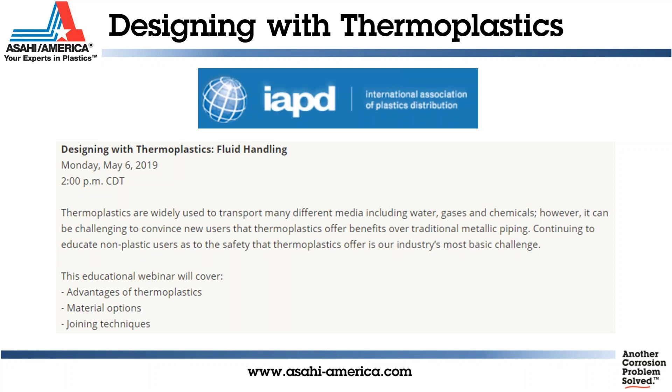As Courtney said, I have 12 years experience with designing plastic pipes. I also volunteer on several committees. The one of note here is the NPPS, non-metallic pressure piping system. That is a new standard that's being issued this month. Be on the lookout through the ASME website. I can direct you to that after the presentation.

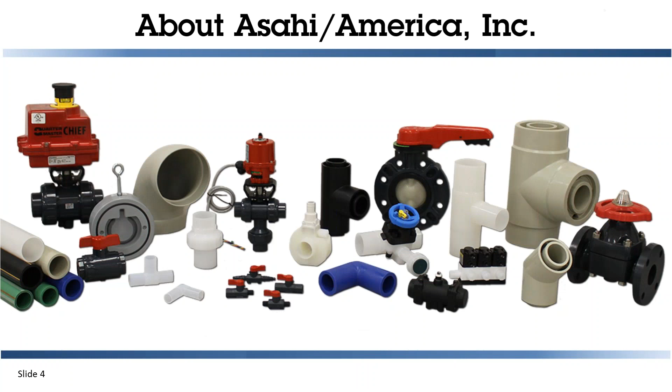Quick introduction about Asahi. We're a Massachusetts-based plastic company manufacturing and distributing plastics throughout the US and Latin America. We stock a lot of different components and we manufacture parts in this facility. A wide range of piping systems and valves in all different materials from PVC to ECTFE.

We have a broad range of applications that we'll go through and tons of application experience. In this presentation, I'm going to introduce some plastics. We'll go over some of the components required in plastic design, installation and joining of plastics, system overview, some important design considerations, common applications, and hopefully some questions and answers at the end.

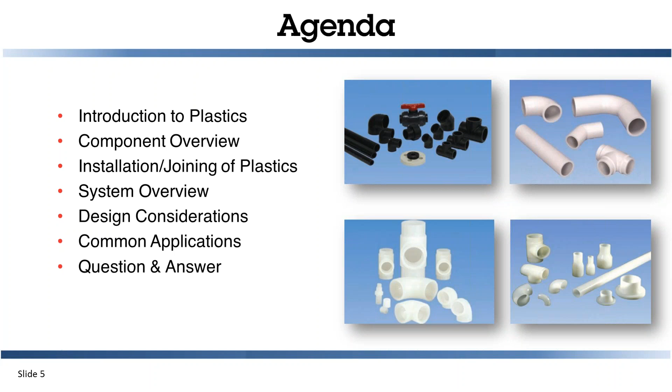Plastic piping systems are offered today in a wide assortment of materials and sizes. Each material has unique and specific properties. The diverse properties allow plastics to become the preferred system for many applications, ranging from the transport of aggressive chemicals to the distribution of ultra-pure water. Because each material has its own unique properties, understanding them becomes vital to the successful design, installation, and operation of a system. Designing a system made of thermoplastic materials differs considerably from that of metallic materials.

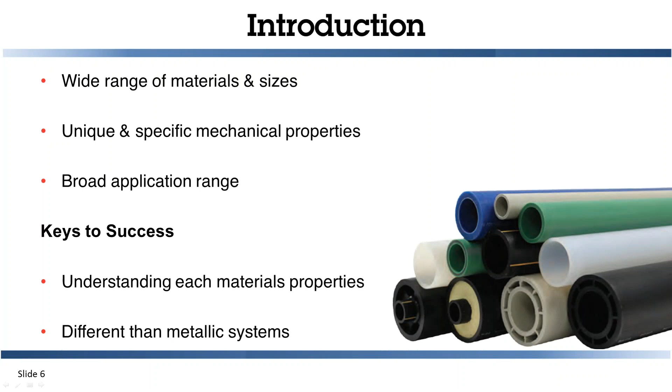This information is designed as a starting point for engineers, designers, and contractors in selecting and installing all aspects of the fluid systems.

Market segments that utilize plastics are as diverse as the material options available. Aquariums have unique challenges that balance the corrosion resistance required from salt water and cleaning chemistries with cost. Most aquariums are publicly owned and have limited budgets, in contrast to semiconductor and pharmaceutical clients who often have healthy budgets but require advanced polymers for production of high-end products. Water and wastewater treatment facilities have dozens of different methods for utilizing chemicals to treat media before and after usage. Just a note that there are over 16,000 publicly owned wastewater treatment plants in the US, all operating similar chemicals and systems.

Chemical manufacturing often requires extremely resistant materials to transport high concentrations of the media. You will find a range of plastics applied in chemical manufacturing facilities. Finally, solid waste and landfills have significant thermoplastic usage. Most sites try to capture the methane produced from landfills with a PE pipe buried within.

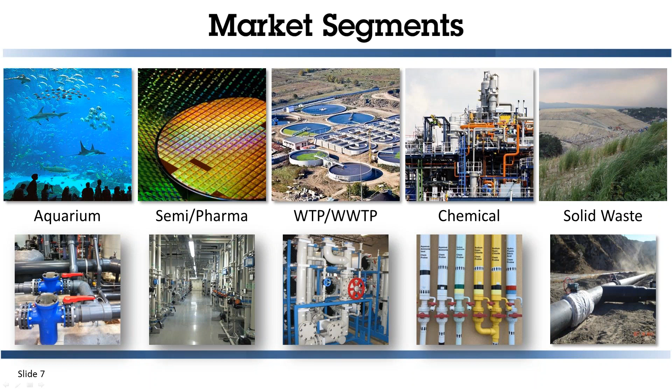Plastics are non-conductive and therefore immune to galvanic and electrolytic corrosion. Because plastics are corrosion resistant, pipe can be buried in acidic, alkaline, wet, or dry soils, and protective coatings are not required. In addition, cathodic protection is not required.

Because plastics are impervious to many chemicals, they are gaining an ever-increasing acceptance and preference in a large variety of applications. Additionally, the variety of materials available allows a wide range of chemical solutions to be handled successfully with plastic piping. All plastic piping materials have low thermal conductivity. This allows the temperature to maintain more than metal systems. You're going to have the temperature insulated prior to the actual piping installation.

Because the interior surface of plastic piping is generally very smooth, less power may be required to transmit fluids. Plastic piping compared with other systems will require less energy to move that fluid.

The relative chemical inertness, and minimal effects of internal and external corrosion, mean there is very little change in the physical characteristics of plastic piping over dozens of years. Examinations of pipe samples taken from some systems have shown no measurable degradation after 25 years of service. Most thermoplastic systems can be designed for a useful life of 50 years and sometimes much longer.

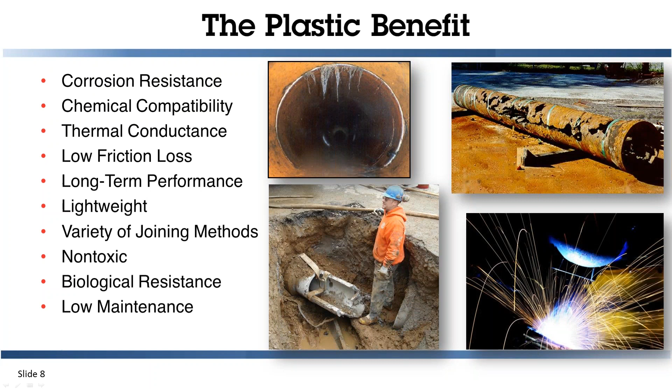So there's a bunch of different plastics out there available, and we'll go through this list summarizing the availability and some of the considerations.

PVC is an excellent material. It has great application range. It's widely available and has a temperature limit of about 140 degrees. It's probably the most well-known plastic out there on the market.

Then we look at CPVC. Its advantages are very similar to PVC, except it has a higher working range up to about 195 degrees Fahrenheit. It should be specified in some instances where hot corrosive liquids are being handled, or you need an extra safety margin.

PE is another very widely available product. There are different grades of PE out there. HDPE, high density polyethylene, is generally superior to LDPE, low density polyethylene. It's important to know which mechanical properties you're reviewing when selecting polyethylene, because there are many different polyethylenes out there. Make sure you're selecting the right cell class for your application. Polyethylene can be used in low temperatures without risk of brittle failure.

Polypropylene is a member of the polyolefin family. It is one of the lightest plastics known. It possesses excellent chemical resistance to many acids, alkalis, and organic solvents. PP is one of the best materials to use for systems exposed to varying pH levels, as many plastics do not handle both acids and bases well. It is not recommended for hydrocarbons and aromatics, and it typically has a temperature limit of about 212F, water boiling temperature.

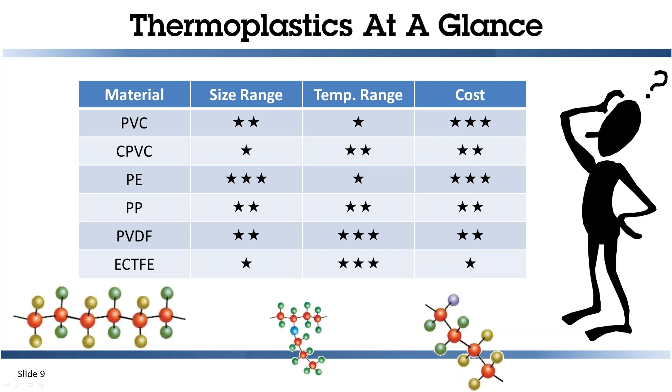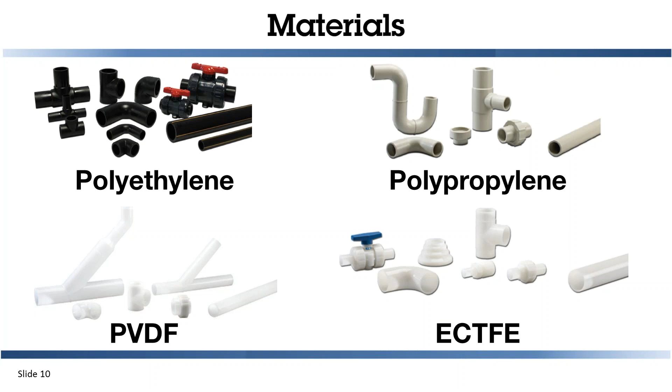Polyethylene has the largest size range available, from 1/2 inch up to 118 inches, about 3 meters, and even being produced above 3 meters today. Wide range of temperatures, 0 to 140, and you'll note that it is UV resistant. Typical applications, we recommend bleach, 85% sulfuric acid for some advanced polyethylenes, and it's used in a lot of gas and water applications throughout the country.

Polypropylene is available up to 55 inch, temperature range of 20F to 212F. It is not UV resistant, so you have to protect it from the sun, whether it's an awning covering the system or painting it with a latex-based paint. Again, a pH range of 1 to 14. Typical applications are caustics and acids.

PVDF is commercially available up to 16 inch, has a range of -40 to 250F. It is UV resistant, recommended for acids and up to 96% sulfuric acid. ECTFE is commercially available up to 4 inch in piping systems, working range -40 to 300. Typical application is 98% sulfuric, chlorine dioxide, and ozone.

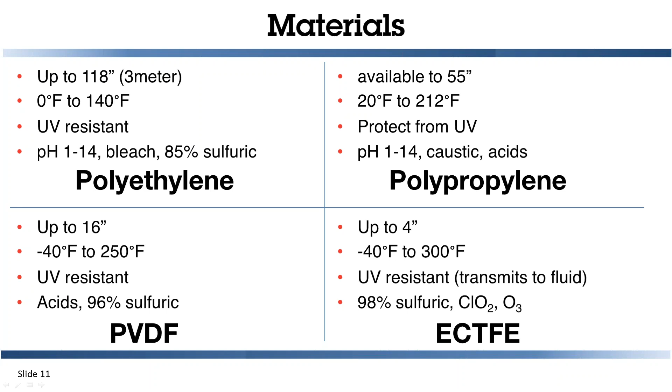When it comes to the component design of these systems, there are two ways of determining the outside diameter: iron pipe size or metric-based systems. Metric-based would be a millimeter-sized piping system.

There are two different ways of getting the inside diameter. The most common is a schedule system, which essentially matches existing steel industry dimensions, like Schedule 40 or Schedule 80. SDR is the standard dimensional ratio, and that's the system we use most for polypropylene, PVDF, and ECTFE systems.

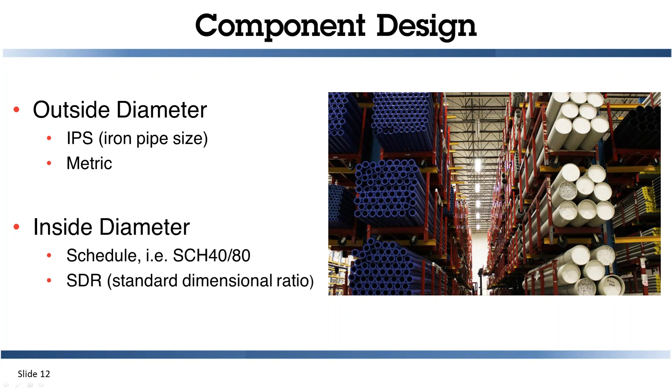Schedule ratings often ignore material properties, and in many cases waste excess material and cost just to meet the required wall thickness. Standard dimensional ratio is more consistent and takes into account the properties of the material. All pipe sizes in the same SDR for a specific material have the same pressure rating.

Let's take a look at half inch PVC. Schedule 40 PVC has a pressure rating of about 350 PSI. When you go up to 12 inch, you have a pressure rating of about 80 PSI.

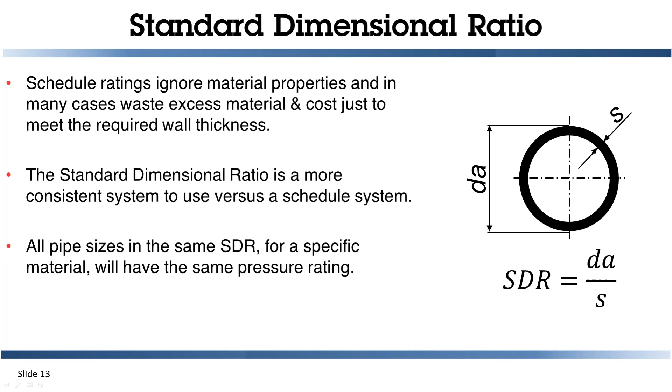Versus polyethylene SDR 11: half inch is 200 PSI, and 12 inch is also 200 PSI. So no matter the size, if the ratio of the OD to the wall thickness is the same, you're going to have the same pressure rating. It makes it very easy to design piping systems across a wide size range.

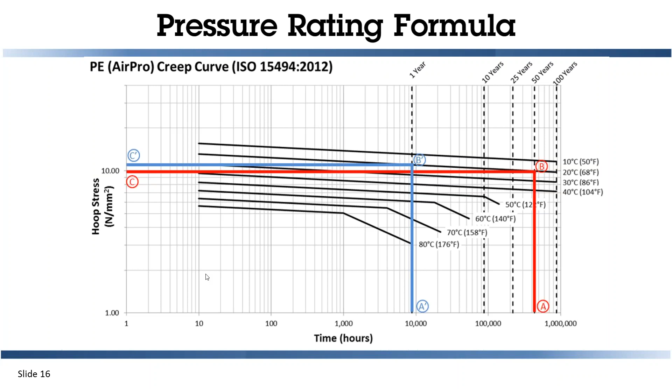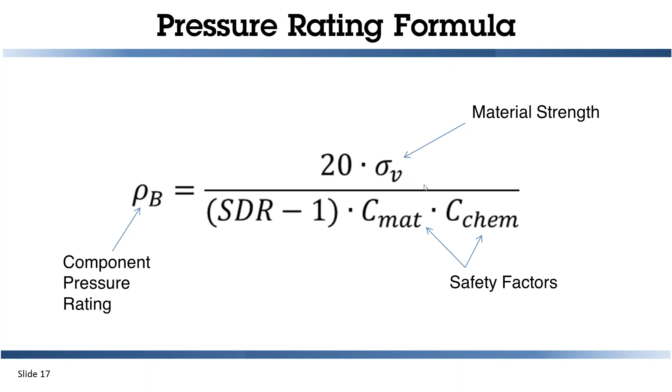When it comes to chemical resistance, it's very important to know where you're getting your information from. There are dozens of compatibility guides out there online - I always recommend asking the specific manufacturer for their guide.

When you are asking for information from the supplier, if you can provide as much information as possible, that would greatly reduce the time to find a recommendation. Remember: stamp, size, temperature, application, media, and pressure.

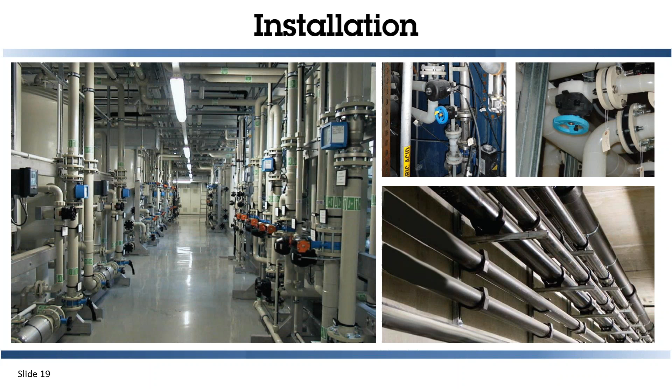Plastic piping can be joined by numerous methods, and for each material there are several appropriate methods. Some of the most common are solvent cementing, socket fusion, and butt fusion. And of course we always have mechanical methods like threaded joints, flanges, O-rings, things like that. That variety of joining methods allows plastics to be adapted and used in the field if you want to transition from metal systems or in between plastic materials.

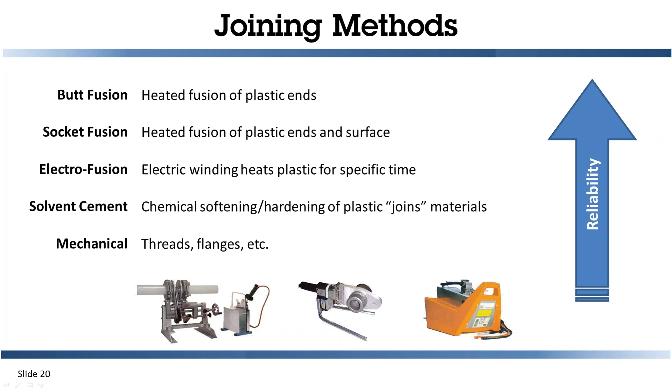On this, we're showing different joining methods. We have mechanical on the bottom, and as we go towards the top of this list, we have a reliability increase, where butt fusion has the highest lifetime expectancy of all these installation methods. And we'll go through them.

Threaded connections are often available up to about 2-inch size. They are available in NPT or metric upon request most times, whether that's an M thread or a JIS thread. We want to be able to adapt to those systems. You'll notice that on the right side, we have a welded side that goes into the pipeline, and on the left side, you have a threaded connection.

One thing to ask the manufacturer is about threads without mold seams on them. That's a common leak place for threaded connections. With these threaded connections, you do use tape on them most often, and you can screw it in, but don't over tighten it because you could strip the threads.

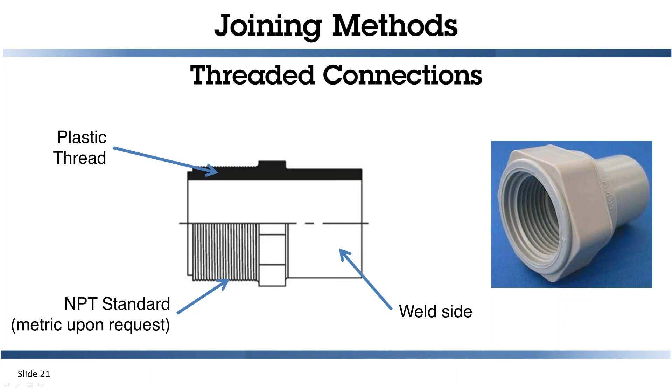Another useful method is a union joint. These are available up to 2-inch in most materials and up to 4-inch in some other materials. It is a static O-ring seal that compresses two sides together. It's a good way to transition between two materials from a similar manufacturer. On one side, you could have PVDF. On the other, you could have polypropylene. If your application allows you to change materials, this is a good way of doing it.

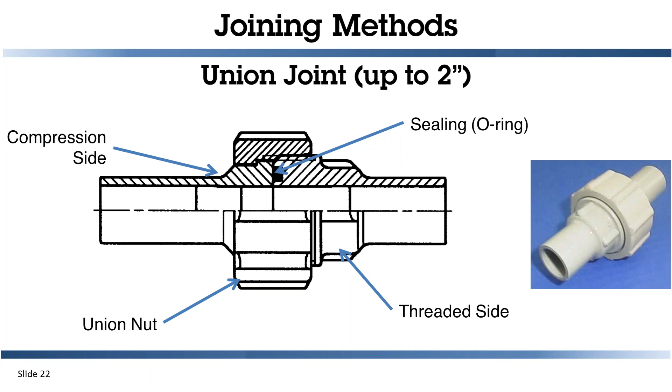If you have larger sizes or are transitioning to metal systems, a flange is the easiest way to do that. Flanges with plastic systems often have what we call a stub end, which you see on the bottom middle, and you have two sides of that with a sealing in between, typically a gasket. Then you have backing rings that have a metal core on the inside that gives it rigidity and strength. Those are bolted together and create a sealing point at the flange.

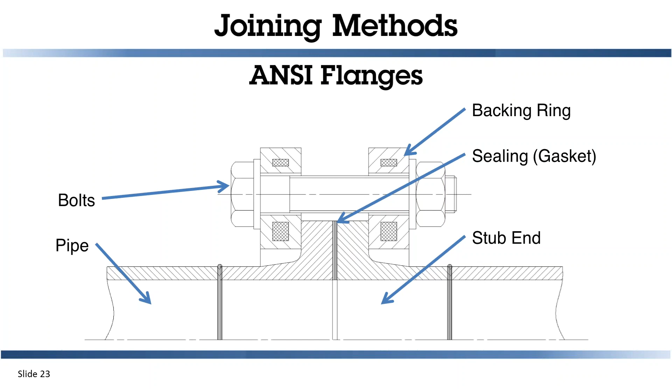Finally, 3 different welding types are available for plastics. We have socket, that's available up to 5-inch, butt fusion, which has no size limit, and electrofusion, which is typically reserved for polypro and polyethylene.

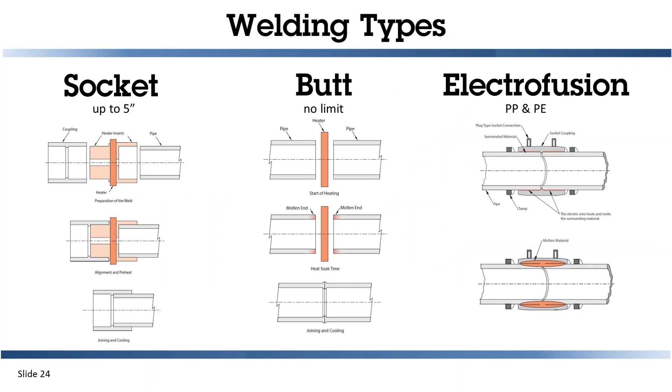Socket fusion has a heated tool, which is the red component in the middle of that picture. On one side, you put the coupling or fitting. On the other side, you insert the pipe. After just a few seconds, they come to temperature, and once they're at temperature, you remove them from the tool and stick it together. One of the critical aspects of this type of weld is people are transitioning typically from the knowledge of PVC to this sort of installation.

It's important that the joiner does not twist the coupling and pipe. It's a common practice in PVC solvent cement, but it does not apply here. It's just a straight in, straight out fitting.

So then we have a highlight here. We have a setup of the tool. We have preparation of that with the polyolefins. Any material that can oxidize, we want to remove that oxidation that's just naturally occurring on the pipe. That's the polypropylene and polyethylene materials. And that makes sure that we have a good chemical resistant bond between the coupling and the pipe.

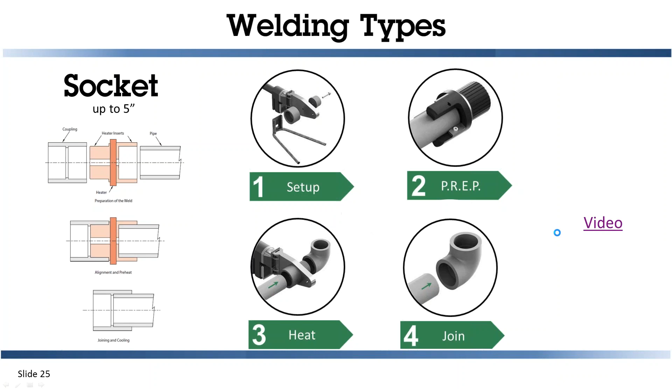This is a socket fusion joint that's been cut in half, and you can see the internal ring of the pipe material. The joining area is actually molecularly bonding the coupling to the pipe. There's zero chance of leak between here because of fusion.

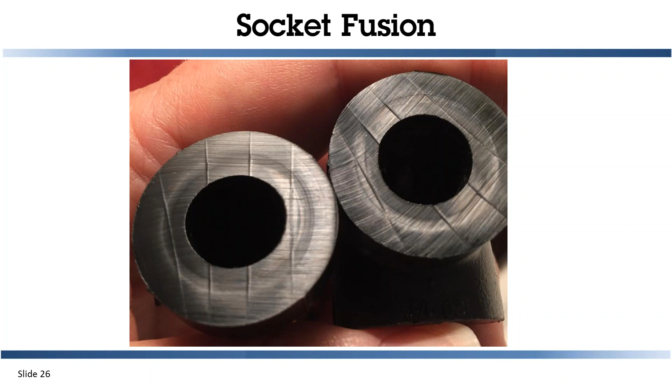Butt fusion, like I mentioned, has no size limit. You have the pipe that's compressed against a heater. After a certain amount of time, you remove the heater and push it together. This is done with a welding tool that is rented or purchased from the manufacturer, and you have to follow the prescribed welding times and cooling times for this. Because there's no coupling here, you're actually reducing the overall labor to weld and install this. You just have pipe to fitting with a butt fusion weld.

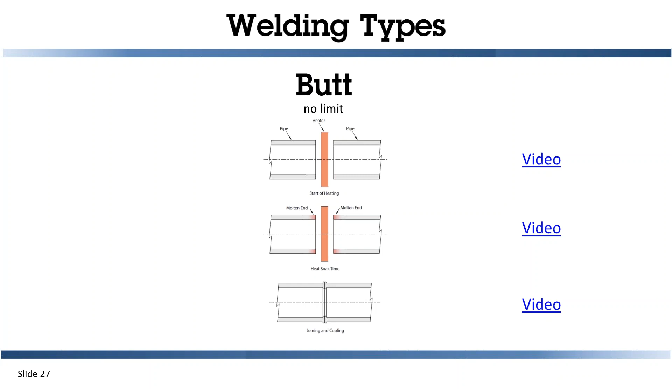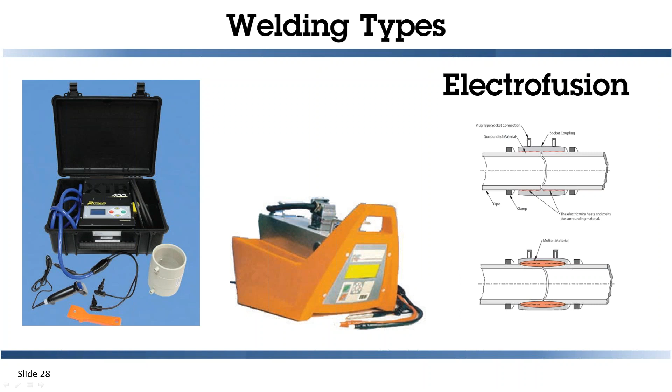This is a great method for water installation. We use it a lot for repairs or changes in direction or hard to reach places like below grade or in a ceiling where you can't bring a butt fusion tool. The added cost of the coupling can add up considerably, so it's not the preferred method for a complete installation. It's a nice system to know about in case you have to use it.

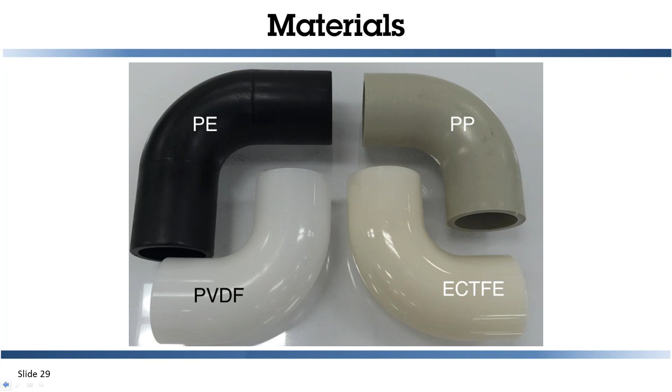And here again, we have the 4 materials showing a smooth radius elbow.

For polyethylene, there's been great advancements in the material over the decades since its beginning in the 50s and maybe even before that. For all polyethylenes, there's a standard tensile test done in an acid bath that attacks the material. It's a full notch-creep test. We put a notch in the strip of material, then pull a tensile test on it at an elevated temperature with a chemical bath. We're trying to get this material to fail so we can know how it's going to react over the lifetime of the system. Time to failure is a good indication of how it's going to resist oxidation from aggressive chemicals.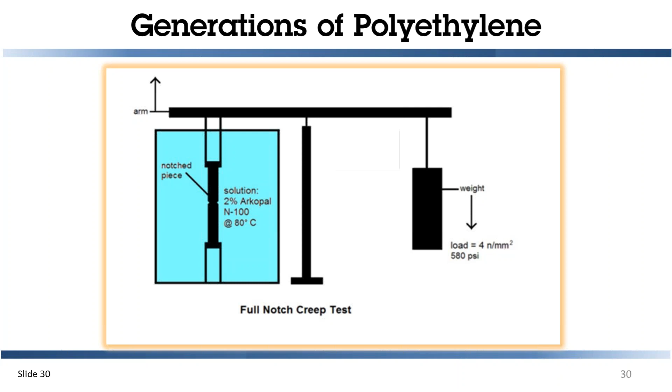This allows us to go into different applications for these materials, the advanced polyethylene, PE100RC. For most polyethylene SDR11 applications, we have a 150 PSI pressure rating. As temperature increases, we need to reduce that pressure, so the maximum temperature is 140 with a pressure limit of about 80 PSI.

Because of this advanced resin, we're able to apply it to really aggressive media like bleach. We know that with sodium hypochlorite and the advanced PE, we can have successful installations of about 110 to 112 PSI at ambient temperature.

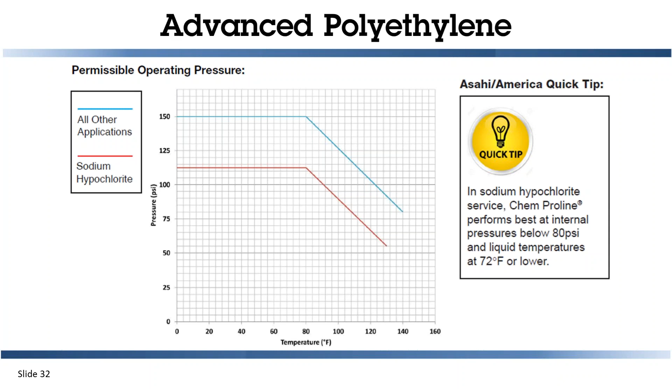That same strength characteristic we see in that tensile test, which allows us to apply it to oxidizing chemicals, is actually good from the outside as well. Here's an application where a pipe was installed in a trench, and the contractor was able to save significant cost by not having to truck in sand to lay the pipe on. Where it's allowed by code, this might be a useful method to install the advanced polyethylene pipe. You can use the excavated material to bury the pipe and not worry about point loads from the rocks.

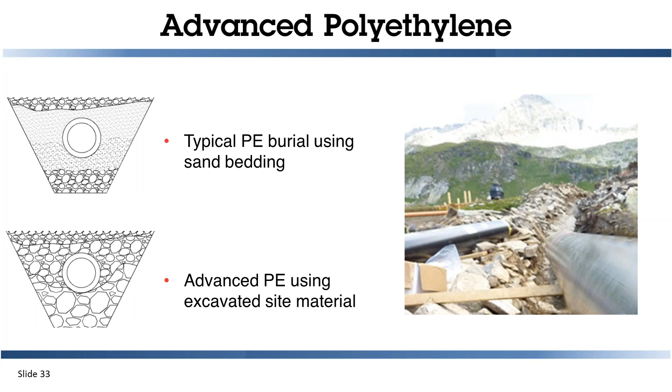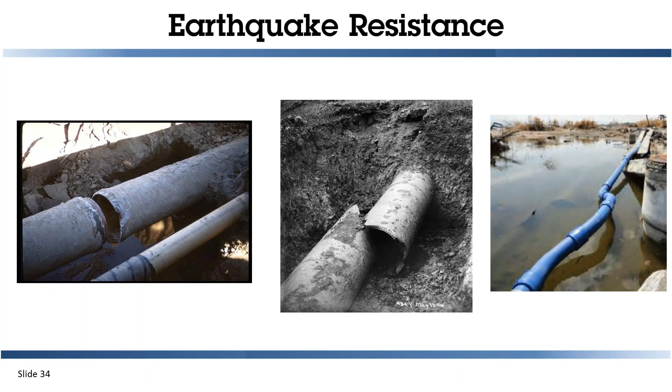In general, polyethylene is used around the world and has great earthquake resistance. We can obviously compare it to steel, concrete, and fiberglass. Polyethylene is very robust and flexible. So here are some images of what might happen to a pipeline in an earthquake.

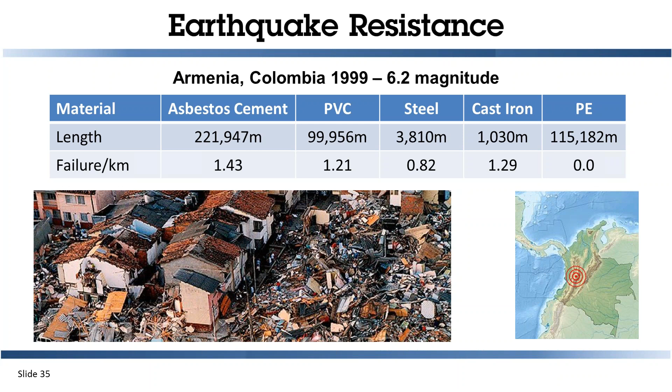A couple of case studies: '99 in Colombia. You see the length of pipelines, and then you have failures per kilometer. Polyethylene had 0 failures in this earthquake, and it was a devastating earthquake. The PE pipe, whether transporting water or gas, still might need to be inspected after the quake for replacement opportunities, but the bottom line is it did not fail catastrophically.

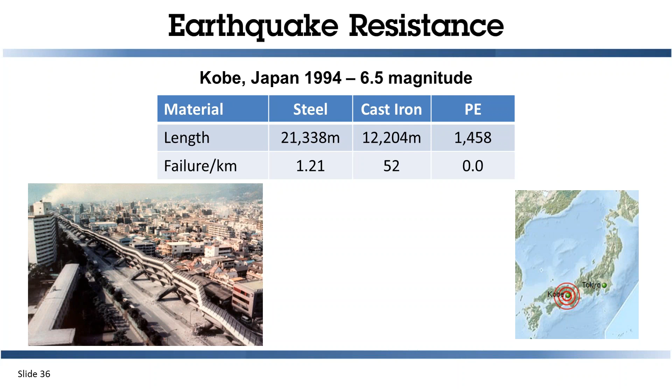A similar situation occurred in Japan in '94—smaller sample size, but again, 0 failures per kilometer. Finally, in Turkey in '99, a 7.6 magnitude earthquake, 0 failures per kilometer versus the other piping systems.

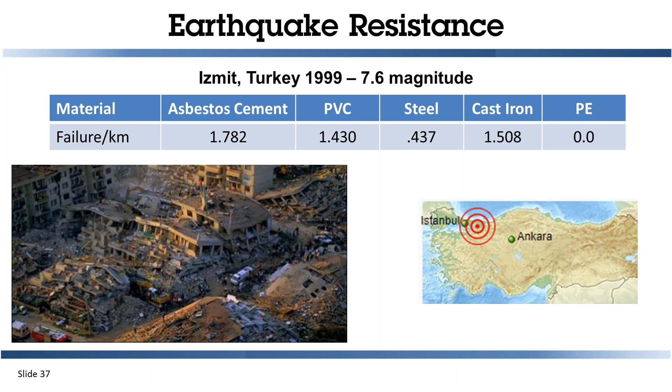Polypropylene is our next material. Polypropylene is available in 2 different SDRs, SDR11 and SDR33. Maximum size commercially is about 55 inch, and those have 2 different resin types: PPR, which is a random copolymer, and PPH, which is a homopolymer.

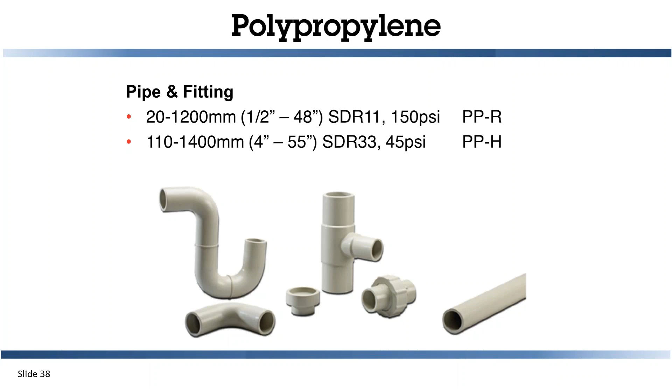PPH is the propylene molecule just connected to itself. It is a homopolymer, meaning no additives in that system. PPB is a block copolymer, where a block of ethylene is added into the material, giving added flexibility and smoothness. It's not really used for piping systems anymore.

People have moved towards PPR, which has a similar concept. It has randomly injected ethylene into the propylene, giving it more uniform dispersion and better strength than the block copolymer. On the right-hand side, you see a crystal structure, which is the surface finish under a microscope. For homopolymer, we're limited to really jagged edges, which is a place where chemicals might attack on a molecular level.

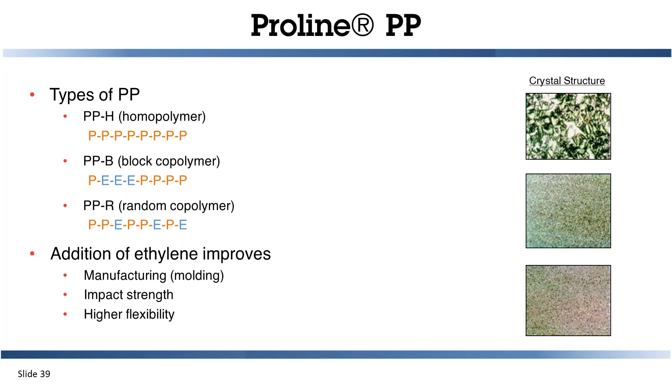By the addition of ethylene, we get a smoother surface area, and that does a couple of things. First, it's easier to manufacture, especially in molding. We have fewer voids on the inside of the material, meaning a higher end quality product. We have a higher impact strength and a higher flexibility, so it will move more. The downside to that is slightly closer support spacing for the PPR systems versus a homopolymer system.

Polypropylene has different applications: one would be water, and one would be chemical. The formula I showed earlier has an area to put in a safety factor for chemical applications. It's important that if you're using polypropylene for water you know that, and if you're using it for chemical, that you add an additional safety factor.

Let's look at the top two lines here for the SDR11 system. SDR11 for water is approaching 200 psi. For chemical applications, we really take that down to 150 psi, which covers a lot of the tenacious chemicals that we're transporting in the systems. That gives you a 50-year life for the chemicals that we say are compatible.

With SDR33, we have a 55-60 psi rating, and about a 45 psi rating for the chemical applications.

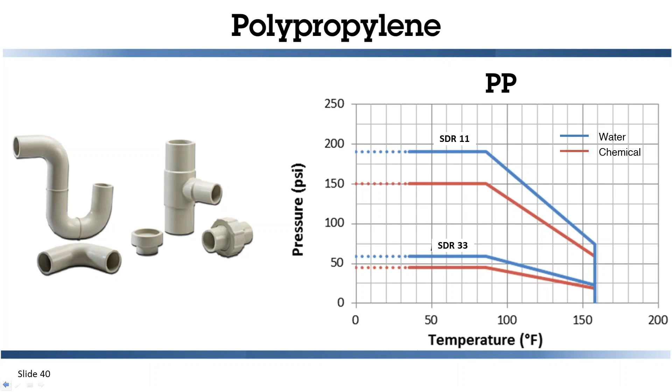Another way of looking at that is the years in service. PPR, because it is a little more flexible, gives a higher pressure rating across the board. So PPR for 1 year is the top line here we see. Depending on the temperature, you have a corresponding pressure rating. PPH is a little more brittle, so we have to be careful about overpressurization, and a little more careful in the design of PPH systems. PPR for 50-year life, easily 150 psi for a very long time at ambient temperature.

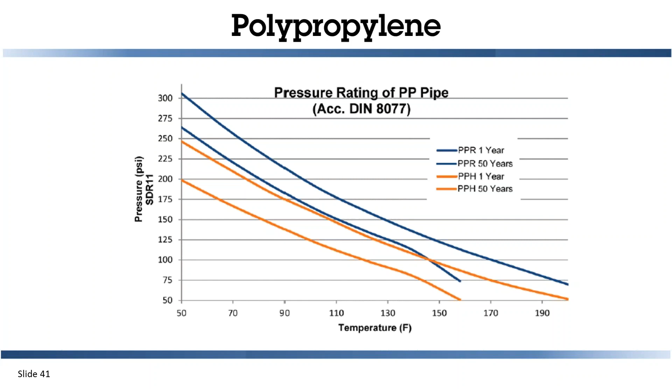PVDF, the first fluoropolymer we'll talk about, has two SDRs available. SDR21 has a 230 psi pressure rating, and SDR33 has a 150 psi pressure rating. So a little bit higher than the polyolefins, and with a thinner wall. The higher the SDR number, the thinner the wall.

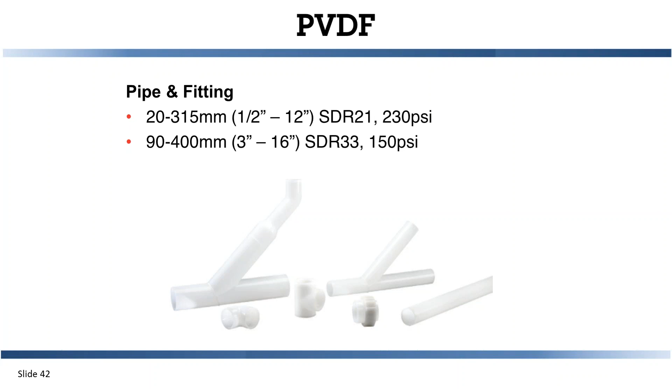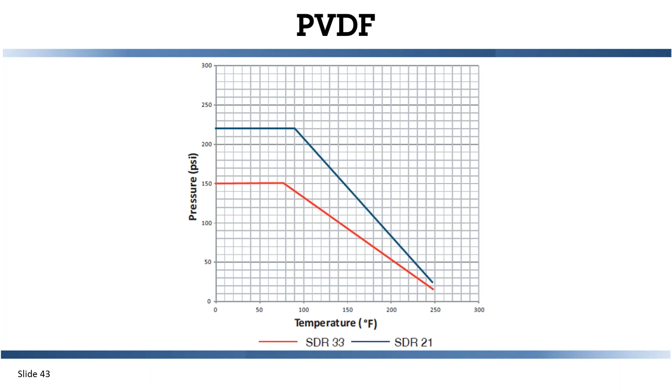One of the advantages, and questions you should ask a supplier, is the availability of that smaller wall thickness. You can save significant cost by switching to an SDR33 piping system starting at 3-inch. If you don't need a 230 psi system, the availability of SDR33 can cut the material cost significantly.

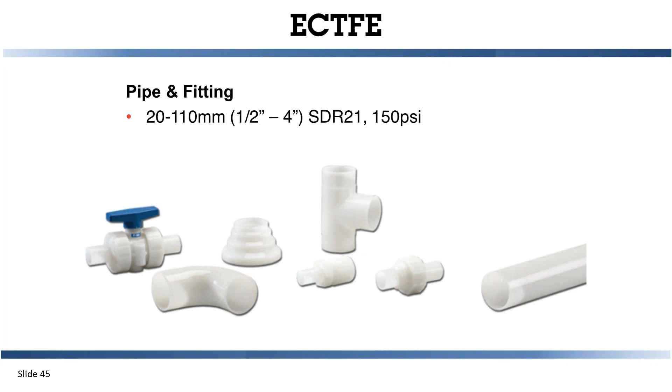ECTFE, the final fluoropolymer we're looking at, is commercially available up to 4-inch. It has an SDR21 design and is 150 psi rated. Of course, all the components—tees, valves, pipe—make it a complete system.

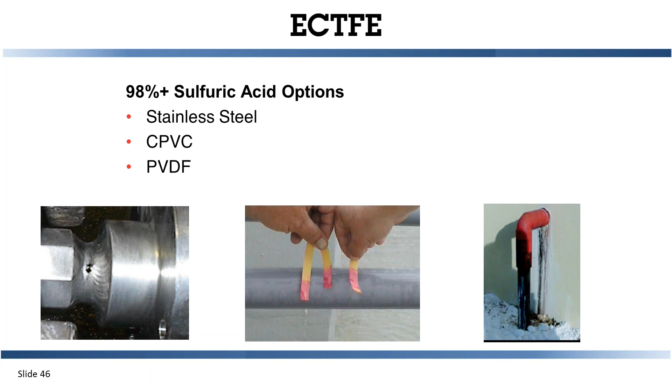ECTFE's main application is for 98%+ sulfuric acid. There are options available. On the left, we have stainless steel being used in that application—you can see the pinhole being formed in that mechanical joint. Then you have CPVC, where the sulfuric acid has actually permeated the pipe and it's acidic on the outside. I certainly wouldn't want to be in that plant with the opportunity to touch that pipe and get a chemical burn. We have PVDF on the far right, which is leaking at the joints, painted red for identification. And that's not snow around the ground—that's the chemical that has actually been leaking.

98%+ sulfuric acid has a contaminant known as sulfur trioxide. Sulfur trioxide is a known stress cracking agent for all PVC, PP, and PVDF. ECTFE is resistant to both sulfuric acid and sulfur trioxide, and that's what gives us the confidence to apply it for these applications.

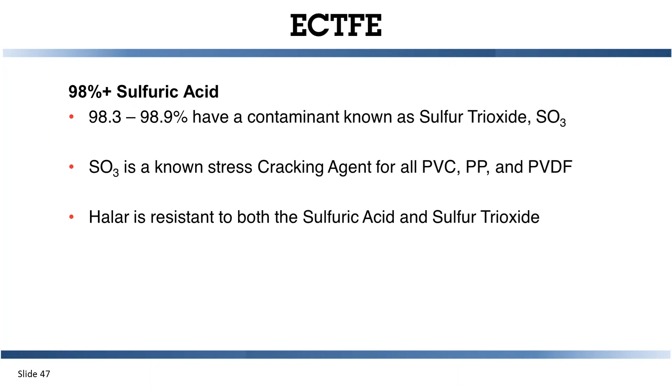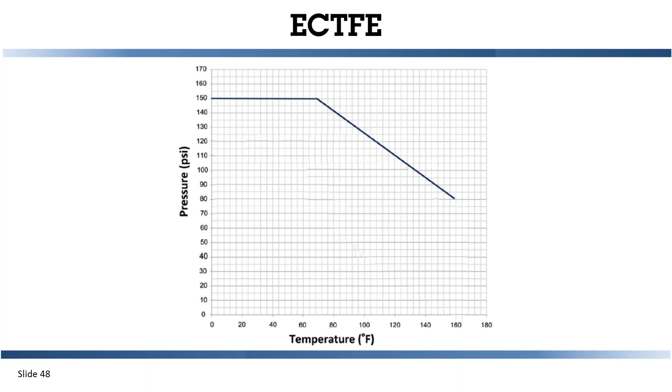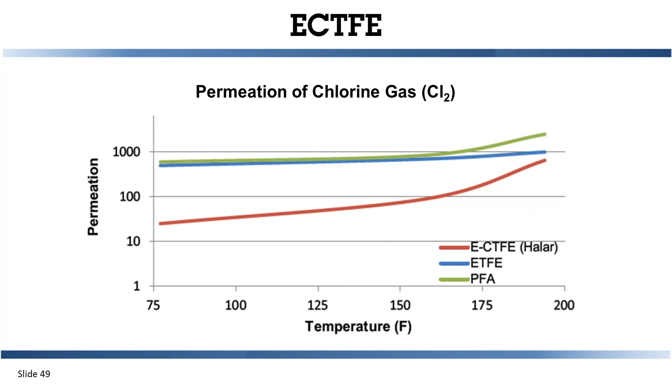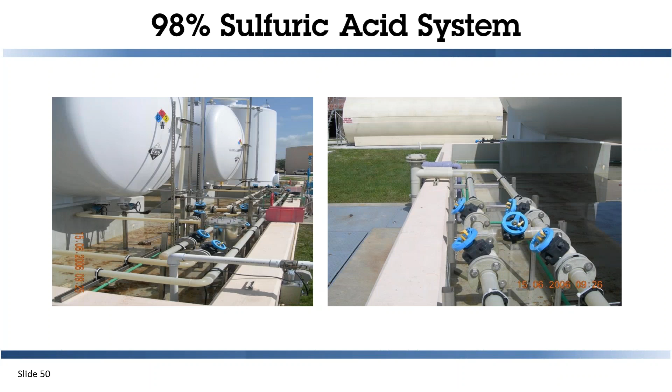A couple of applications: wastewater treatment plants that are using 98.3% sulfuric acid, with lots of tanks taking this into a building for dosing.

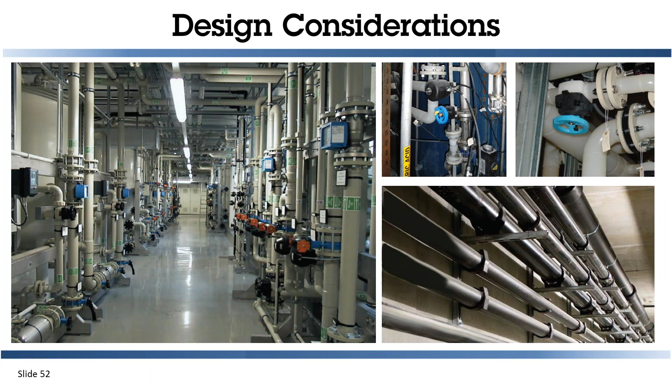So back to our installation images. How are these nice installations? Because people have considered them and designed it with plastic materials in mind.

One of the most important design considerations is the expansion and contraction of the piping systems. Plastic will expand far more than metal systems. Polypro and polyethylene expand at a great rate of 1 inch per 100 feet per 10 degrees, about 10 times that of steel. For all plastics, we need to consider how it's going to react when you install it versus the operating temperature.

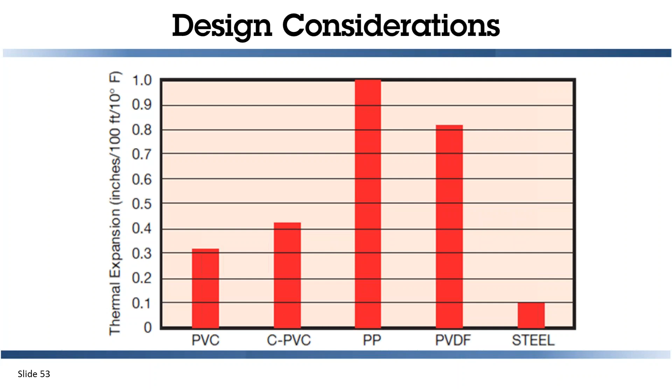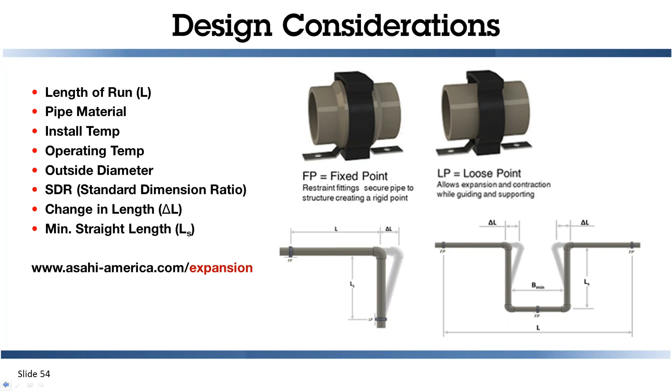If you only had two fixed points on either end of the pipe, the expansion of the center portion will become like spaghetti, and you're going to have a visually unpleasing pipeline. To make it straight, we want to guide that expansion so it does not sag, so we use loose points in between those fixed points so the pipe remains straight.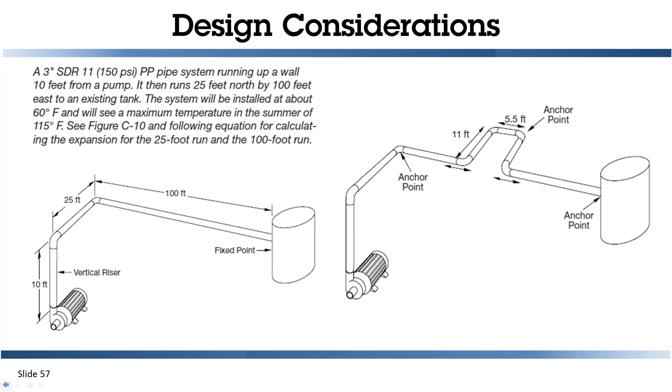Here's an application of a long pipe run. This was actually installed in the right-hand corner of a buried trench, and the designer made their own band straps to go around fittings. This was advanced polyethylene for a bleach application.

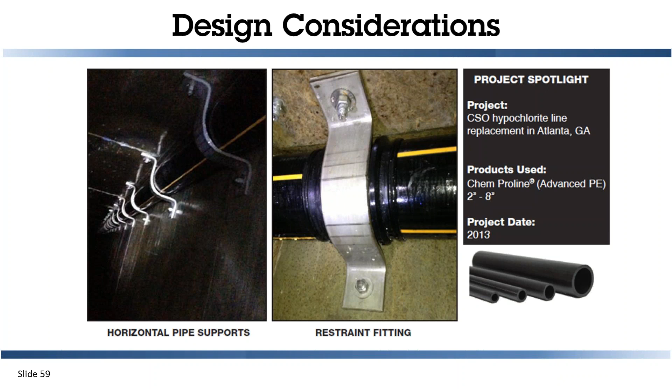Another nice thing about plastics is that they are pretty flexible, and we can build that into our design. If you have an outdoor installation, you can reduce or eliminate elbows used in the field by simply bending the pipe. Typically it's about 20 to 30 times the piping diameter, depending on the material and temperature, where you can actually bend the pipe around a corner. Useful for large outdoor installations.

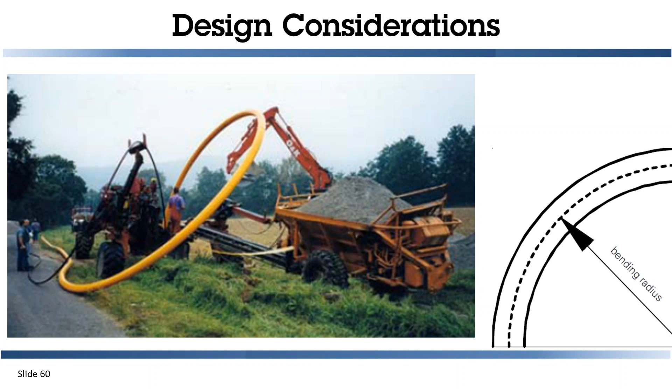I like to show this image because it gets us thinking about how to avoid this in the future. Some of the best ways to avoid failures on site are to select the right material, make sure that you're doing the proper weld method, and make sure that your contractor is knowledgeable on installing the systems and has been trained by the manufacturer so that you're reducing your risk on site for failures.

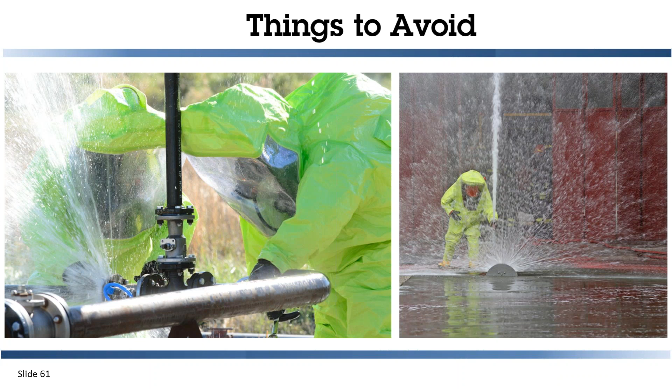Common failures in bleach piping, as you see here, is leaking of pipe at solvent cement joints. This is bleach attacking the joints and coming out of the fitting. So what is the perfect pipe? It really doesn't exist. You're trying to balance the cost of the material with the lifetime, and most municipalities don't have an endless budget, so we're trying to create a system that has a long life at an affordable cost.

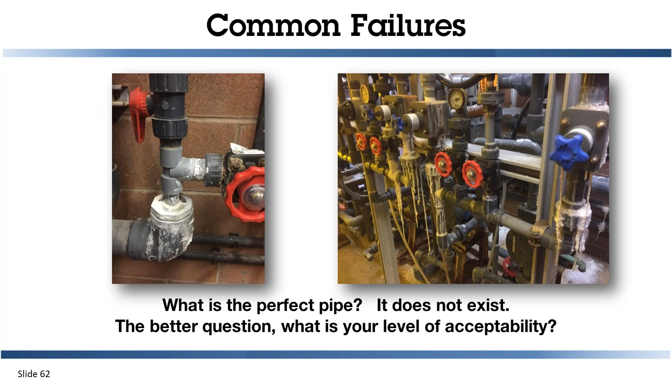So why does PVC tend to fail with bleach applications? When it comes down to it, a solvent cement joint is nothing more than a cemented fitting. We have separation here. This is a peel adhesion test where we're taking the coupling and peeling it back off the pipe. If we were to do this on polyethylene or polypropylene, you would actually have the pipe and the fitting peeled back together and ripping.

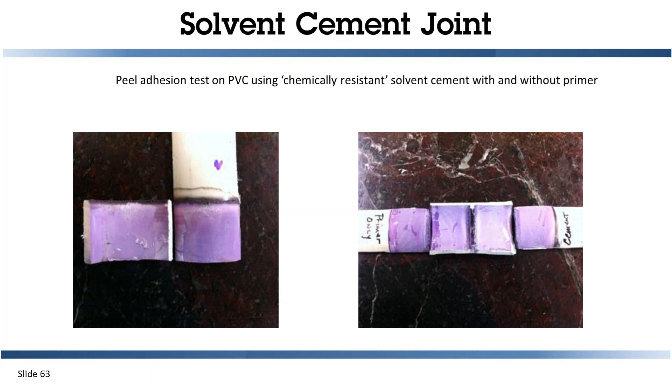So this is one of the common areas of failure because it's so available. People are using PVC where it's maybe not necessarily chemically resistant. Education on the proper thermoplastic and proper installation method will really reduce this in the future.

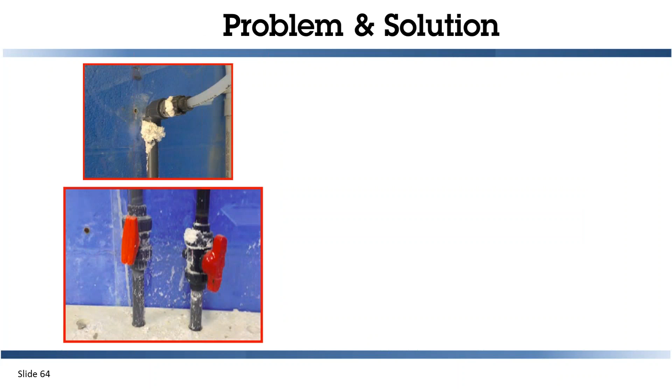On the left, we have a bleach application. Again, valves look like they're leaking. The joints on the top are leaking. The solution is a welded system using the advanced polyethylene material.

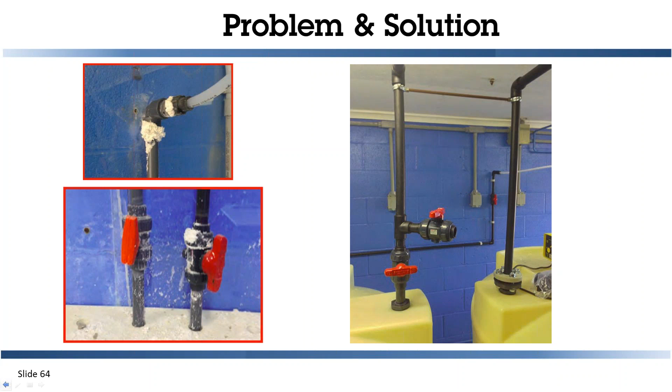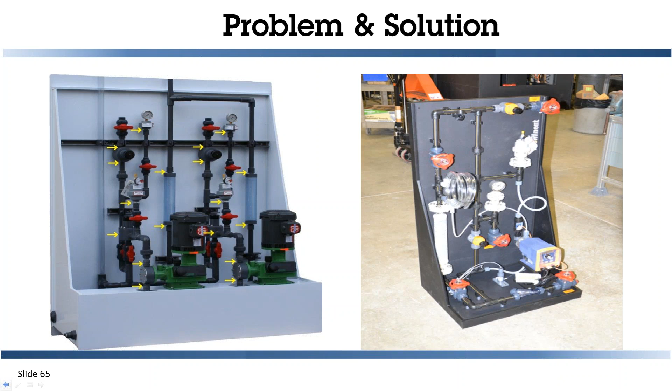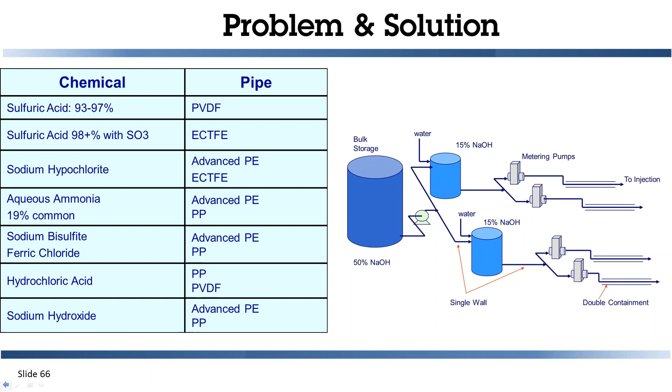For sodium hypochlorite, advanced PE or ECTFE. Aqueous ammonia, 19% is the most common, we have advanced PE or PP. And then we have sodium bisulfite, ferric chloride, hydrochloric, sodium hydroxide, all different options based on the customer's acceptance for price, size considerations, and total available pipeline they're installing.

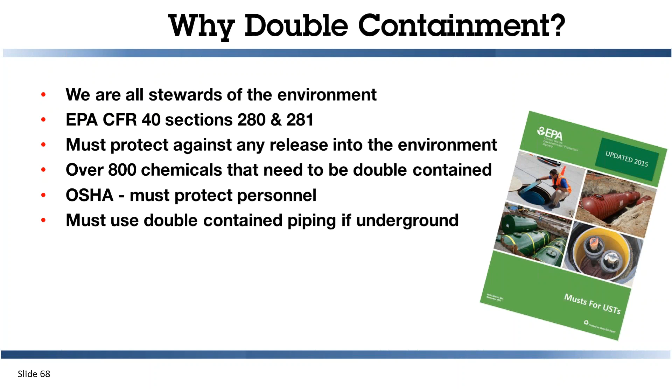OSHA also has some recommendations on overhead pipelines. If there is a leak, then we want to protect the personnel working underneath it, and we can do that with double containment by catching the leak, detecting it, and shutting off your system.

So thank you everyone for your time, and hopefully there are some questions that Courtney has been collecting.

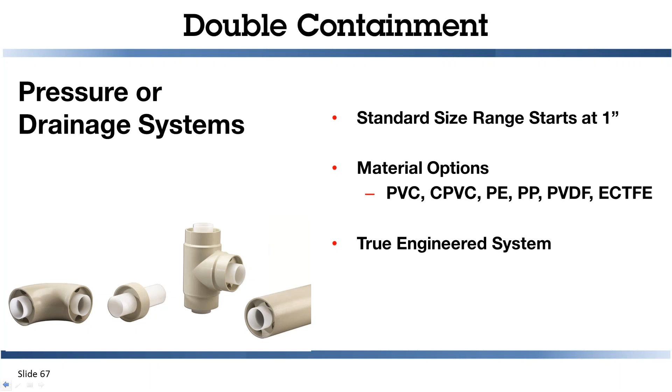All right, next question - would you be able... Just another statement on that, the EPA requires 30-day containment on the outside pipe. So because it doesn't need to be designed for a 50-year life, you can often get away with a lower cost material that's going to hold that in for at least 30 days. Once you detect it, the system's done its job and you can go in and repair, replace, clean up.

Great, thank you. Would you be able to run clear PVC in the double containment tube you mentioned? Yeah, there are certainly systems out there with clear PVC. Clear PVC has some challenges with both UV and atmospheric chemical resistance. A lot of people like the idea of clear PVC as containment because they're going to be able to see where that leak is. But EPA does require an electronic system for pressurized systems that will detect if there's a leak, so visual inspection is not enough for pressurized double containment systems. But yeah, there are certainly clear PVC systems out there.

All right, thank you, Alex. That concludes our question portion and our presentation.